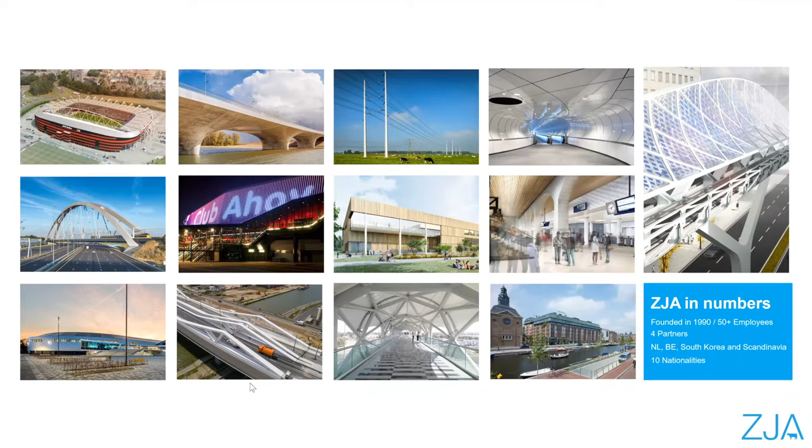For those of you who don't know us, we are ZJA. We are an internationally recognized architectural practice founded in 1990 by Moshe Zwarts and Rein Jansma, located in the city of Amsterdam. As a practice, we operate at the intersection of architecture, design, and technology. Our projects range from large-size, complex infrastructure projects - stations, bridges, theaters, stadiums - mainly active in Netherlands and Belgium, and now also getting into South Korea and Scandinavia.

The office is led by Rein Jansma, Rob Torsing, Randall Top, and Ralph Keft, along with a creative team of international professionals from diverse nationalities. We draw upon state-of-the-art technical expertise thanks to our in-house R&D groups, where we focus on computational design and various methods of introducing structural optimization in the design workflow. We are also now really focusing on the SDGs, the Sustainable Development Goals lined out by the United Nations, to see how our design can be informed by these SDGs. We're also trying a bit in the realm of mixed reality to see how that can influence the design workflow and this virtual environment.

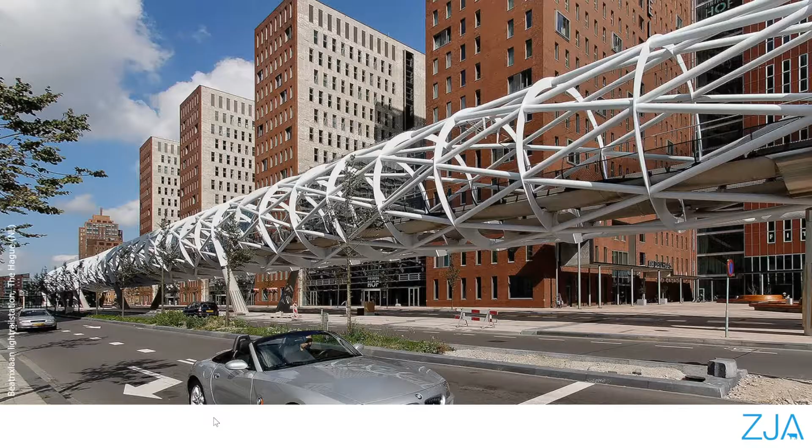We are more than a typical architectural firm. We are not just architects, but we are actually all of these things that you see on your screen. And all these expertises find their ways in our projects via exhaustive research and design. ZJA has been a big advocate of cross-disciplinary collaborations to achieve outstanding levels of innovation.

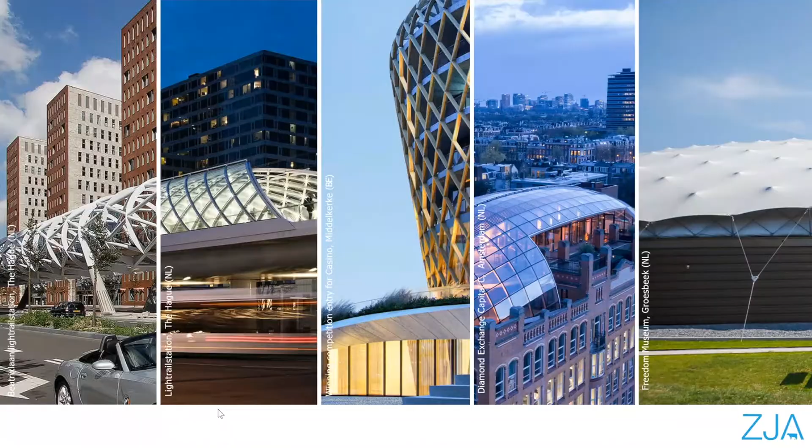We believe in architecture that is technologically advanced, sustainable, and beautiful. These all contribute to the building's character, but in my opinion, it's more than that. Buildings such as the Freedom Museum in Groesbeek that you see on your screen perform in terms of the performative aspect, such as lowering the overall building's energy load while ensuring more environmentally sensitive design.

In the course of time, with many buildings as it goes, there's an increased need for extra surface area, and the museum also wanted to be able to offer a new program that would be more in line with modern requirements. So there had to be a larger building, but one that would fit within the budget.

A solution that met all requirements came in the form of shaded dome technologies. But, what is a shaded dome? Everyone would ask. It originated from the idea of developing climate-controlled indoor sport facilities in hot-dominated physical environments.

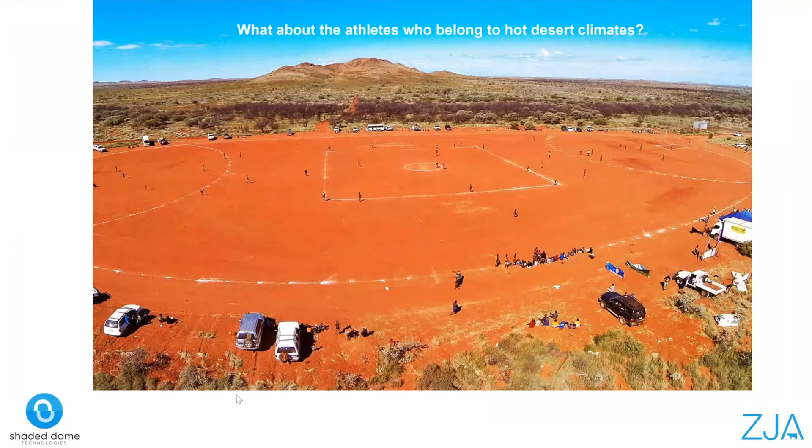The exploration began keeping in mind the FIFA World Cup 2022 in Qatar, which also needed these kind of adaptable indoor training facilities. How could we protect the athletes from the heat? The next question came. The solution to the challenge came in the form of shaded dome.

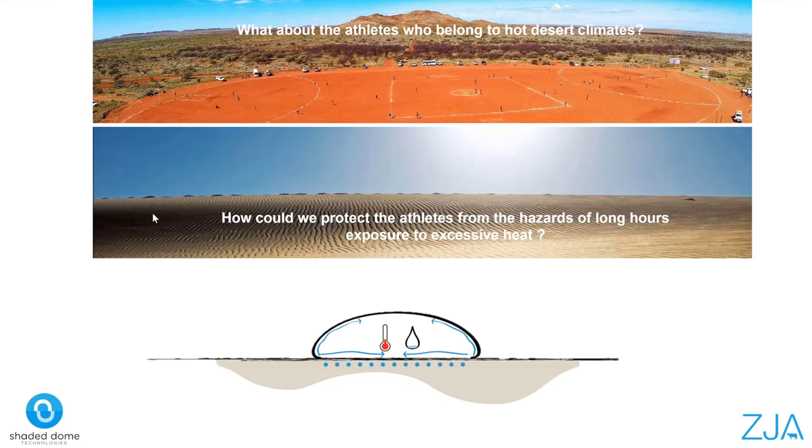It comprises of an air-supported pneumatic structure, which you might have seen in your nearby tennis or football facilities. These inflatable structures offer a perfect solution when it's impossible to perform activities in the open air all year round. Then we introduce a tensile membrane structure, or a tent, on top of it. The combination of the dome and the shade forms a hybrid structure, which we call the shaded dome.

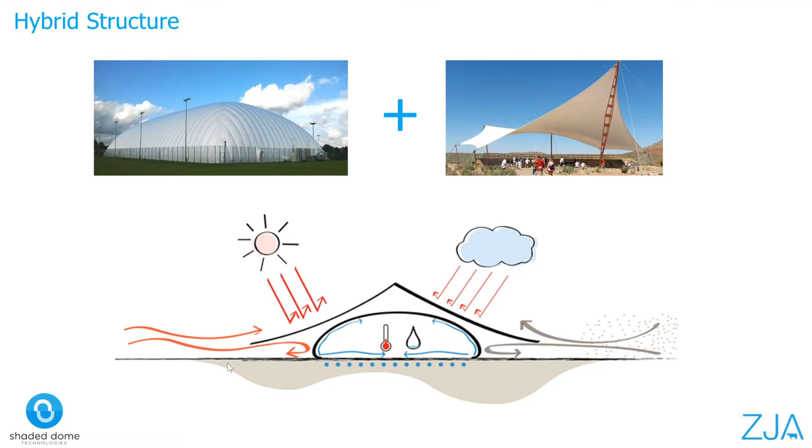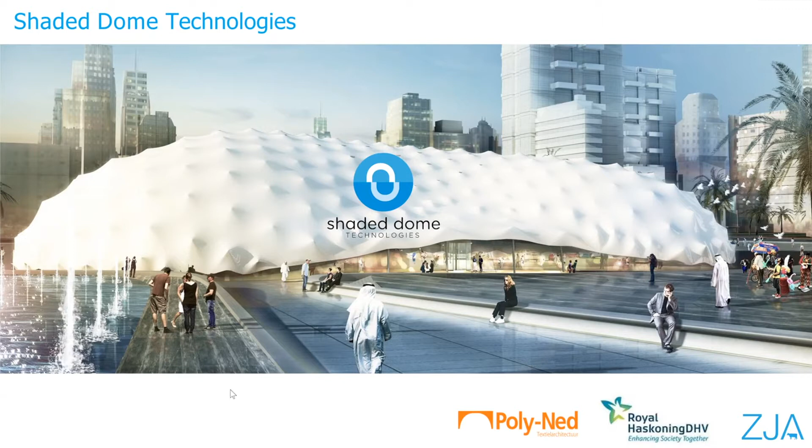3 Dutch companies, ZJA, Royal Haskoning DHV, and Poly-Ned, teamed up and took up the challenge to develop an eco-friendly, semi-permanent and innovative idea. One of the key drivers was being able to quickly assemble and disassemble a shaded dome within a matter of just 2 to 3 weeks.

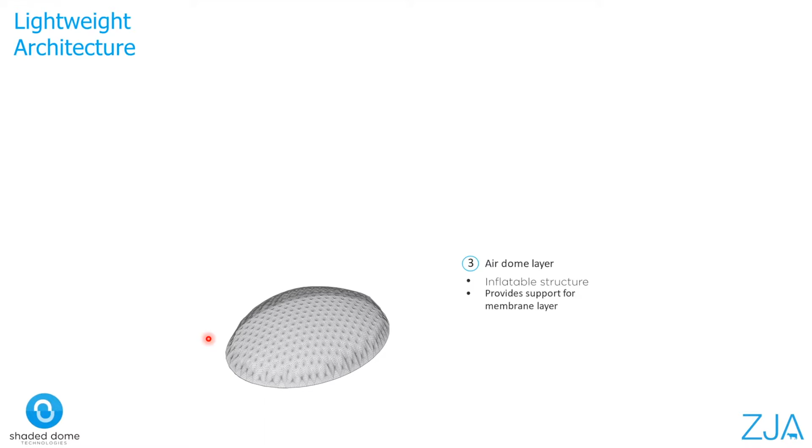Talking about the composition, as I've already mentioned earlier, it comprises of an air-supported dome. This is the core of the shaded dome and operates in principle similar to a generic air dome, allowing air pressure to act as the main load-bearing system.

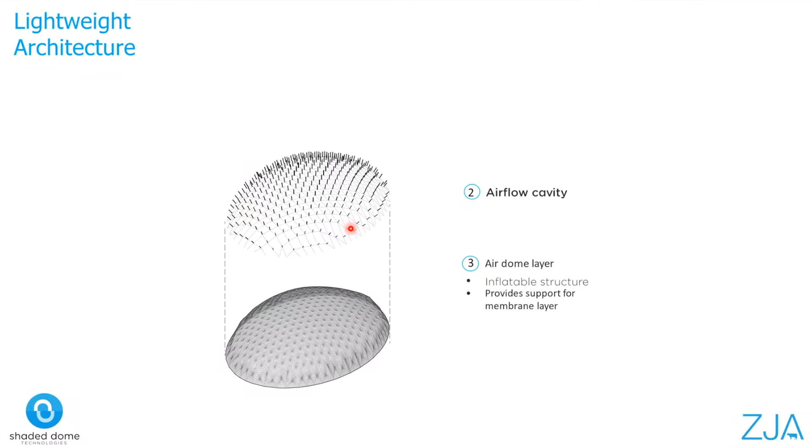The air-supported dome is then covered by a custom-made steel cable network. This cable network dictates the overall shape of the dome and carries the majority of the loads. This is followed by a grid of spacers, or struts, which are these verticals at cable net intersections that form a link between the air dome and the membrane layer, or the shade, on top.

These spacers maintain the cavity spacing and transfer the overpressure from the air dome to the shade, while external loads such as wind forces are transferred in the opposite direction from the shade towards the dome. The shade also, on the other hand, shields the dome from excessive solar radiation, wind, and precipitation loads.

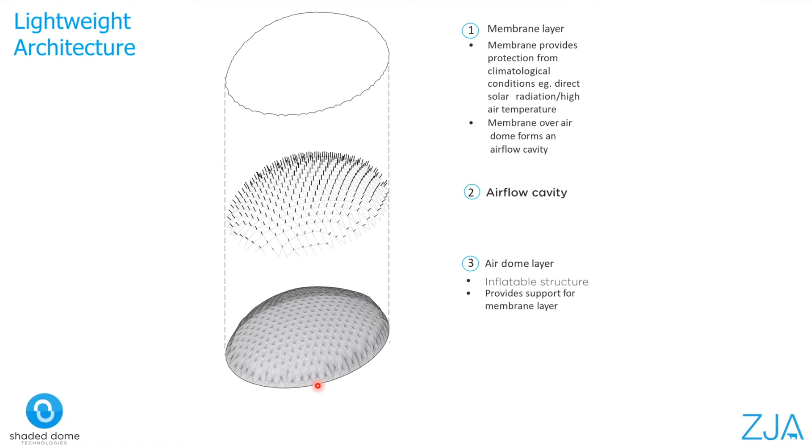Just coming back to some basic fundamental principles. Whenever you talk about a tensile fabric structure, they're generally tensioned, and they achieve their structural stability due to their doubly curved surface or anticlastic shapes.

Here it is no different in the shaded dome. The global convex curvature, which you see, is the result of the overpressure within the air-supported dome, which are represented by these blue pluses, and the force being transferred to the above shade via spacers being represented by these blue arrows on your left-hand side corner.

These patches contribute to the local concave curvature. The combination of a global and a local curvature within the tensile membrane provides stability to the form.

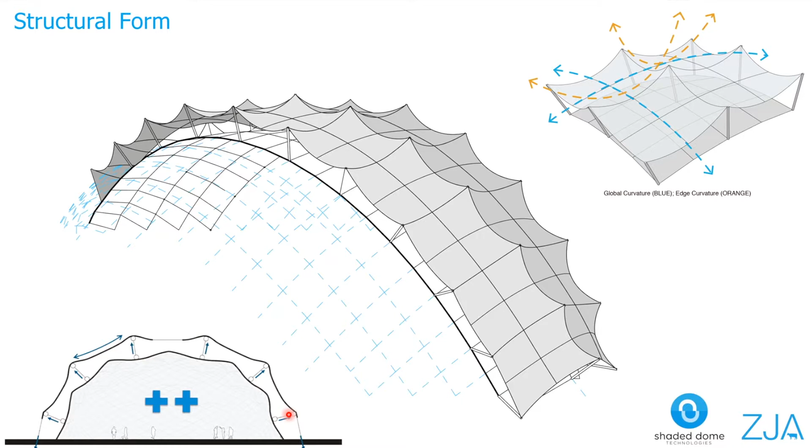At the periphery of the shaded dome, in the two corners you see here, the membrane is fixed to the foundation by either anchors or suspension cables.

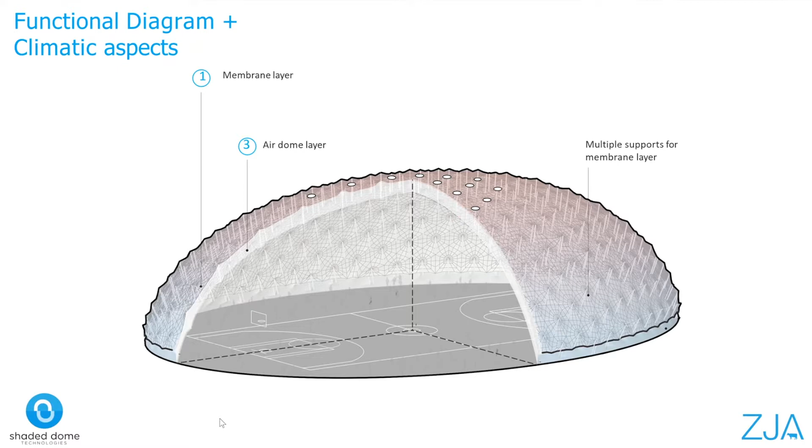Let's talk about the climatic aspect of it. The air cavity between the shade and the dome acts as a buffer zone between the outer climate and the inner microclimate. When direct solar radiation hits the shade, the heat conducts through the membrane and heats up the air within the cavity. As a result, the warm air rises to the top of the cavity, where we have openings present, releasing the warm air out.

Due to the chimney effect, the cooler air is automatically drawn into the cavity from the ground level, thus creating this continuous flow within the cavity.

This principle has been validated using both computational fluid dynamics simulations and physical prototyping. It has been observed that this can bring down the temperature inside the dome by 5 to 10 degrees, which is very useful for warm weather climates, but could also be useful in cold weather climates.

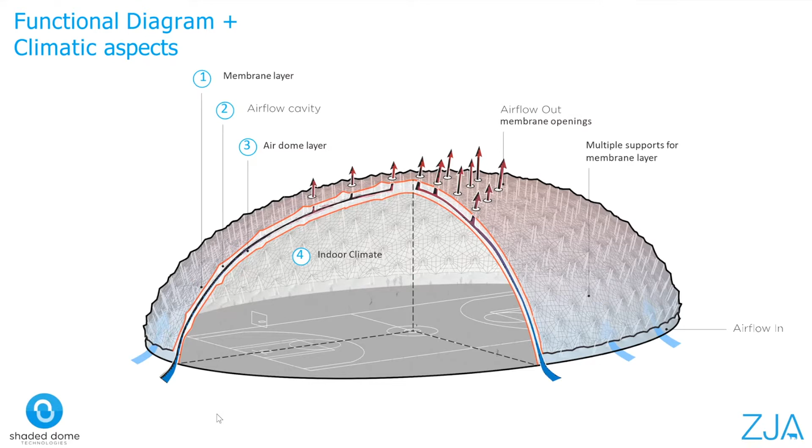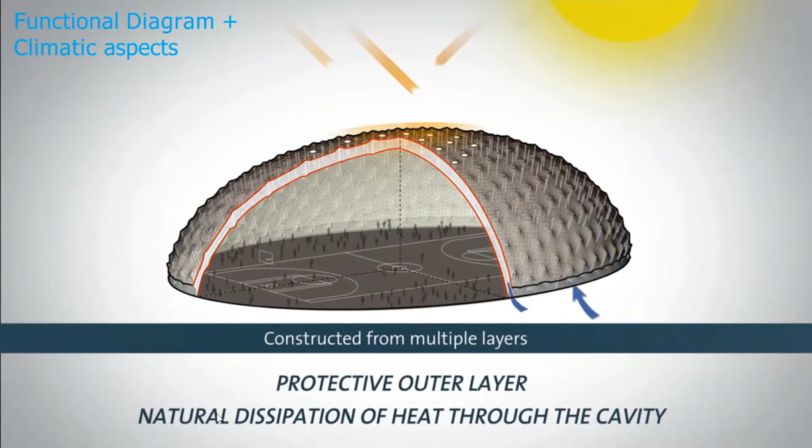Although air supported structures and tensile membrane structures are quite common, the combination into a hybrid structure like the shaded dome is quite unique and novel, and therefore the design has been granted a European patent. It is something we are really proud of.

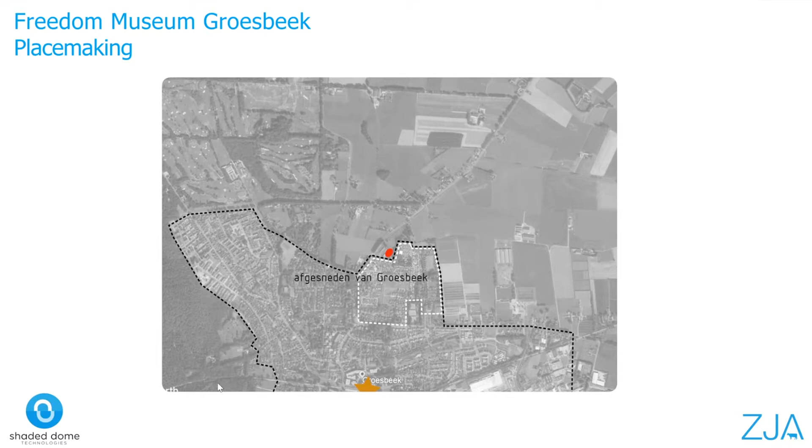Now that everyone is aware of the shaded dome concept and how it operates, let's talk about the Freedom Museum. It is located on the edge of the village Groesbeek, as you see here.

The old existing museum building was very inward looking and did not do justice to the location and the beautiful views around. One of the most important starting points for us was to adapt the museum to the landscape. This theme is reflected in our design in various ways, and you will see it coming back as we move along in today's talk.

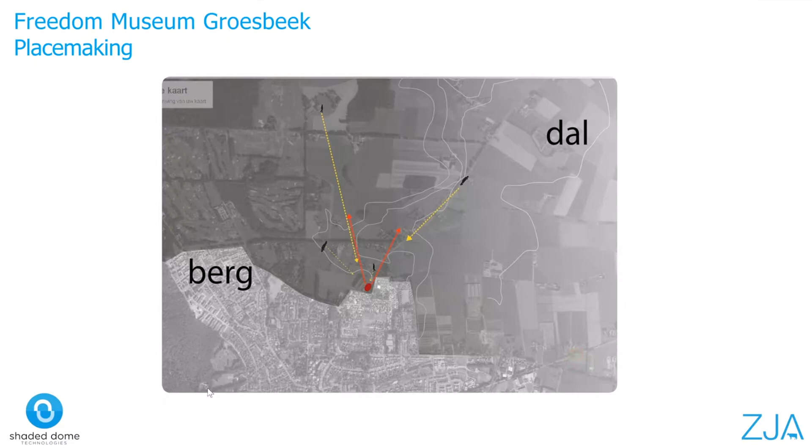The idea was to reinforce the existing slope and create a visual relationship with the valley, thus connecting the museum with its immediate surroundings. Here, the shape of the landscape was determined by the shape of the new building and the functions which it holds around.

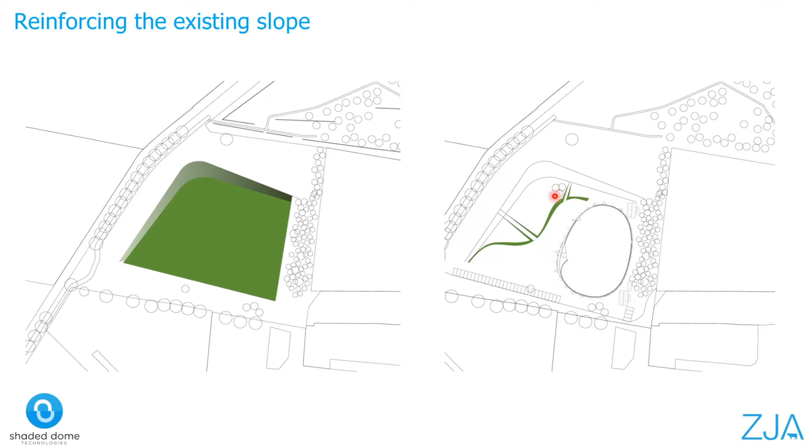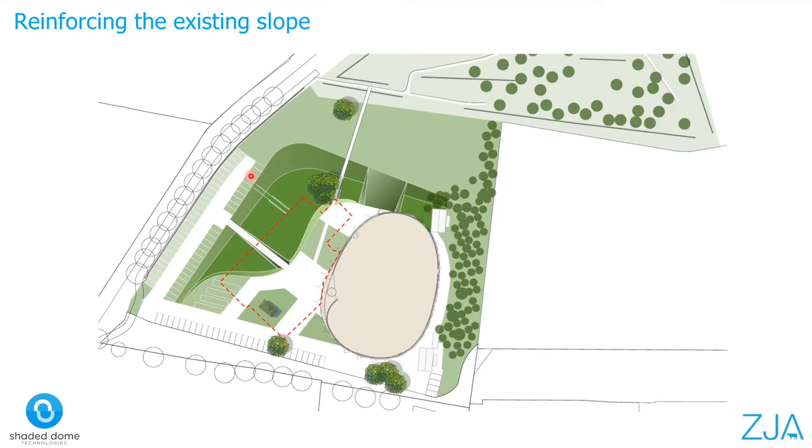The museum is aligned towards the landscape, marking a clear entrance for visitors and framing the view over the valley. The dome is also tilted so that it opens towards the front court, and hence the plinth is created, which acts as the front facade of the building.

The museum stands out for its iconic appearance within the green and flowing landscape design.

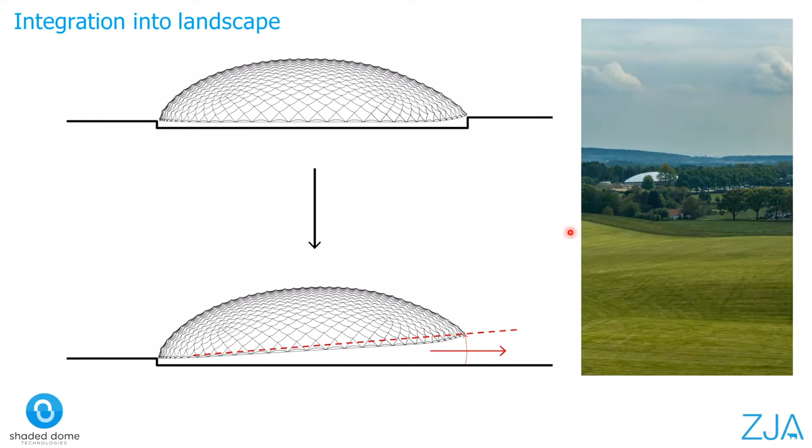The building is approximately 64 meters in length and 46 meters in width, and at its highest point reaches approximately 12 meters. The building operates at two different levels, one being the main ground floor level and the other being the basement level.

Let's give you a short tour around the museum. As you visit the museum, you encounter the main entrance.

Here you see the plinth peels and bends inwards, creating a niche where the front entry door is allocated. This inviting gesture immediately informs the visitor of the right orientation to enter the building.

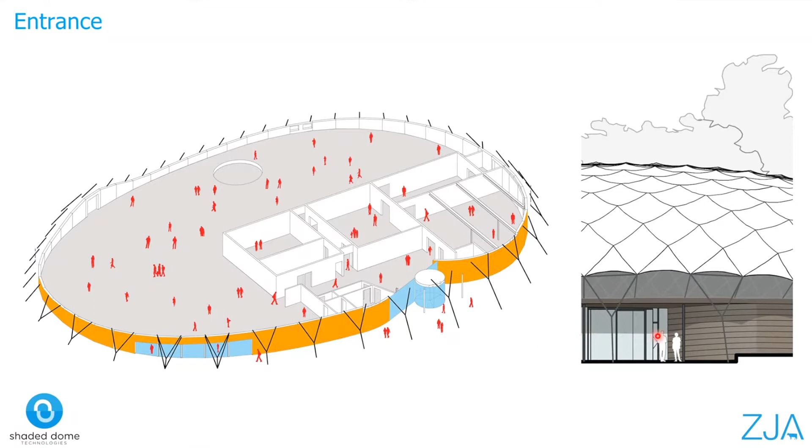A simple bronze colored seamed aluminium, or kalzip as you call it, was chosen for the cladding of the plinth. The horizontal lines of the cladding also accentuate the sense of movement and dynamism.

Once inside, the visitor walks into the front desk where they are welcomed, and the height and spaciousness of the interior space is quite noticeable as you enter.

Due to the large free space that the dome offers, it provides many possibilities for organizing exhibitions, as there are no restrictive constructive elements like columns that you might find in any other traditional building.

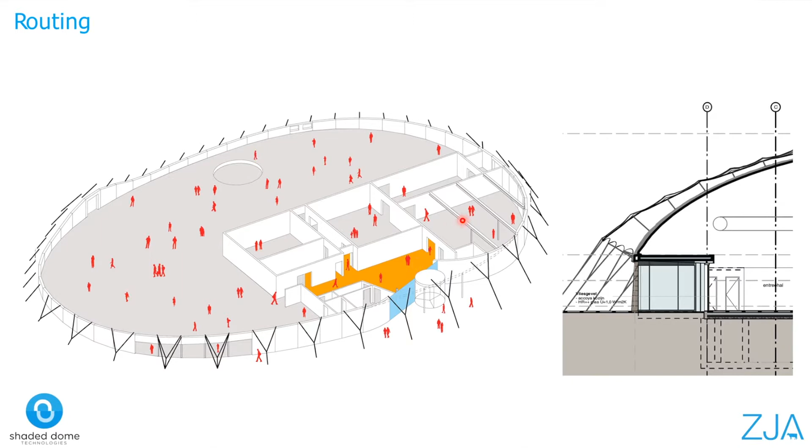After leaving the coat in the cloak room, you can choose to visit the temporary exhibition or the permanent exhibition in front of you. Let's begin with the temporary exhibition first.

One of the challenges for us was to keep the exhibited pieces in top condition. These pieces are quite old and fragile in nature, so it was very important that the indoor climate could be managed properly and controlled.

Thanks to various methods or measures such as extra insulation of the roof and the box-in-box solution, we were able to achieve the desired level of indoor climate control in terms of temperature and relative humidity.

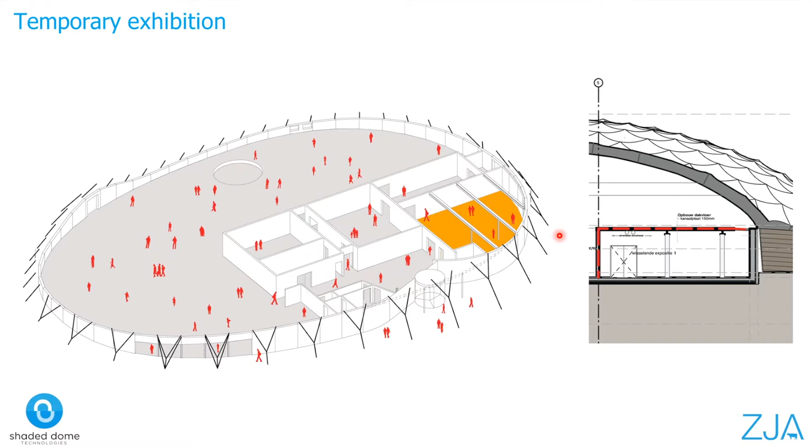From here, the visitor enters the permanent space through a wide corridor in the middle of the dome. The dome from within is completely black. It was a deliberate choice to accentuate the focus of visitors to the exhibits. The exhibition space is around 1300 square meters and has an indoor climate in accordance with ASHRAE Class A specifications.

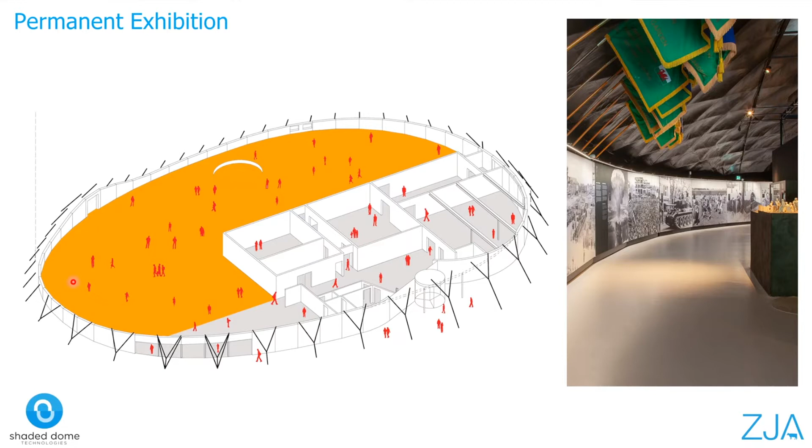The visitors can then move towards the museum cafe. This space has a very different atmosphere and has a more indoor-outdoor feel to it. Here the visitors can disconnect from the exhibition for a while, enjoying a nice cup of coffee, and can enjoy the view of the valley from which the Allied divisions once left for Germany.

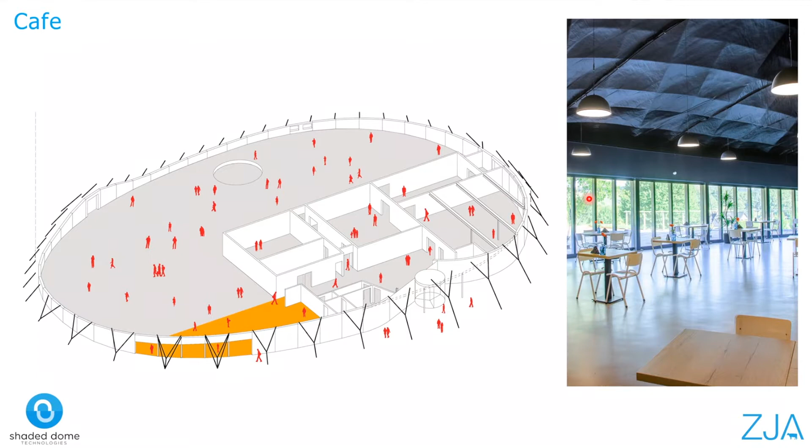Apart from these exhibition spaces, toilets, and shops, the basement accommodates many of the museum's supporting functions like meeting rooms and working spaces. The museum is also connected to the existing depot below the demolished museum by means of an underground corridor, so that all supporting spaces remain interconnected. It's also a way of bringing how you can connect the new with the old so that there still remains a connection between them.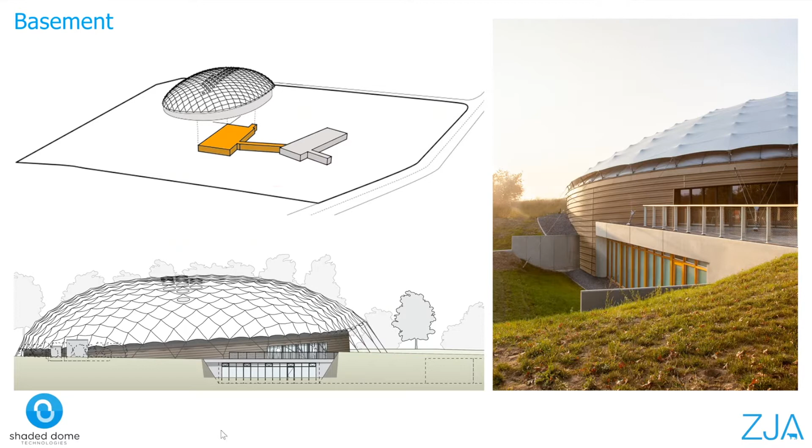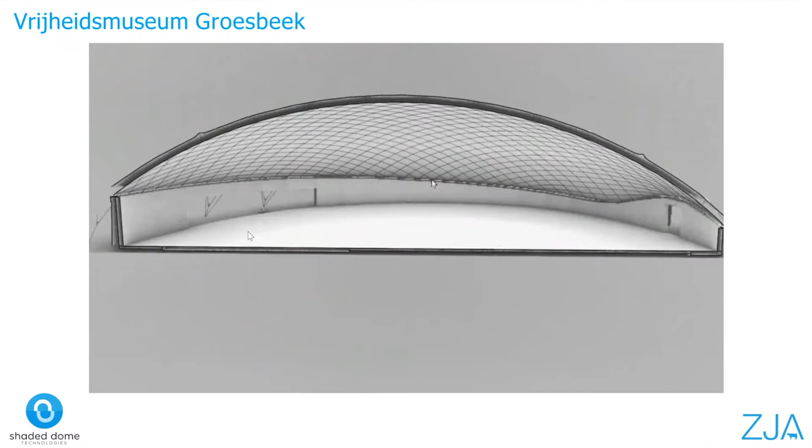Just to give you an overview of the internal spaces within the Shaded Dome, you can see the box-in-the-box concept and this immense volume it encloses. It's an incredible space to be in, and I would really advise, if you have time after corona, please visit this museum and experience it. It's a very special building.

Which province is it located in? In Groesbeek, it's in Gelderland. Okay, Gelderland, yeah. It's not that close, but okay, you have to make a plan.

And of course, for constructing such an unconventional building, you need the right set of tools for the job. We at ZJA worked out the geometric principles for the Shaded Dome and created the computational design tools that make it relatively easy for us to take the first steps towards architectural design. It allows us architects to pull or push the geometry, but it's also a bit more than that—it's also an informed decision. In order to assess the most aesthetically acceptable and tentatively stabilized form, the design requirements are the main input for the parametric model.

Therefore we use several generative and computational algorithms, such as positioning the entrances, optimizing the size of the fabric patches which form the shade and the dome, producing the cable net, and using relaxation and inflation simulations to get the right form. Hence we do have a shaded dome generated in a virtual world, but it's still very much disconnected from what happens in reality. So this is the first step—we have the shaded dome in the virtual realm.

Next step: the parametric model we generated does not provide constructive information yet. Its primary function was to determine a rationalized shape and geometry. This geometry is later explored and validated by our engineering partners Royal Haskoning DHV in terms of structural engineering and building physics, using finite element method analysis and CFD simulations to validate. We did our own CFD simulations in-house beforehand just to see where we stand, giving us insight into how it affects the building geometry, but the final validation was done by the engineering partners.

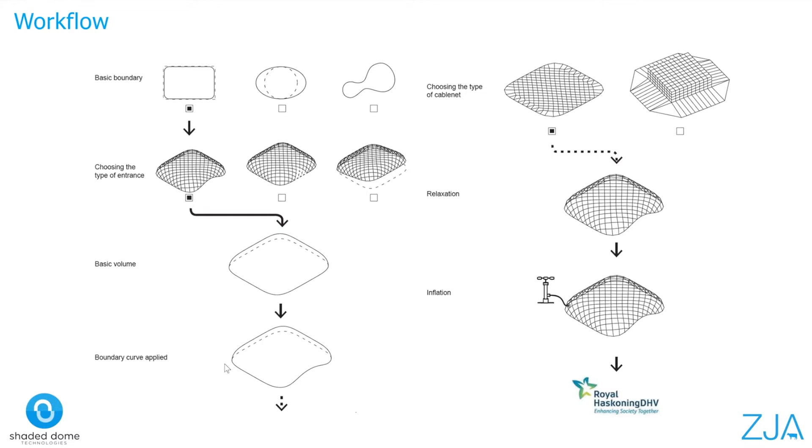After this verification, the latest adjustments were introduced to our parametric model. Our algorithm then generates relevant files for the components—the dome, the cable net, the struts in between, and finally the shade and suspension cables—which are necessary for manufacturing and assembly of the building.

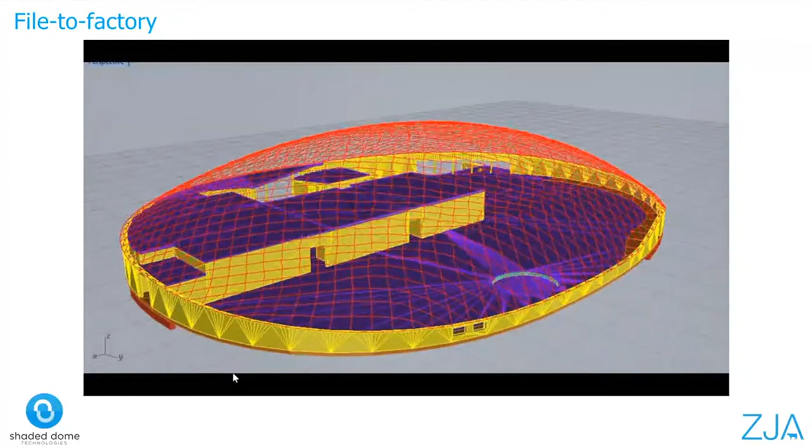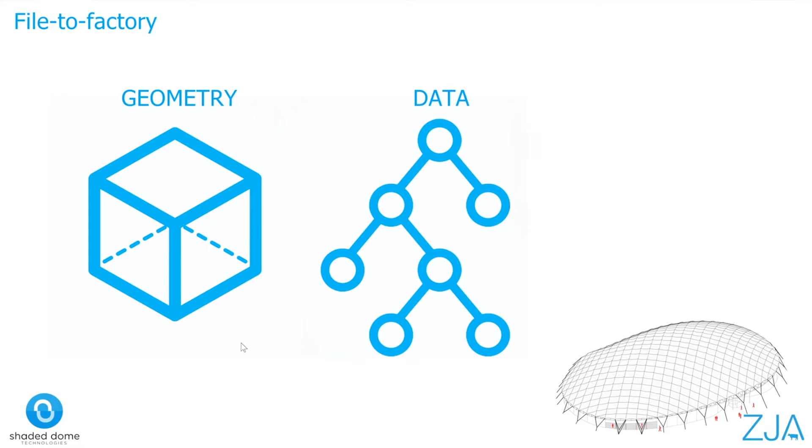In our construction process, we actually skipped the step where, generally speaking, a fabricator is assigned to create his own set of working drawings, which contributes to extra time, money, redundancy, and inefficiency. Trying to manage the stream of data trees in the form of points, lines, and meshes was a challenge in itself. I'd like to give a shout out to my colleagues at ZJA, Jack Bucker and Ralph Kluth—they played a key role in this regard, bringing order to this complex tree of geometry.

What we managed to achieve here is a paradigm shift in itself when it comes to design and production workflow. Different parties involved shared their insights with other partners. For instance, Polynet had to share their knowledge about the nuances of fabric material properties with us. Otherwise, we would not have been able to make such an informed and working simulation.

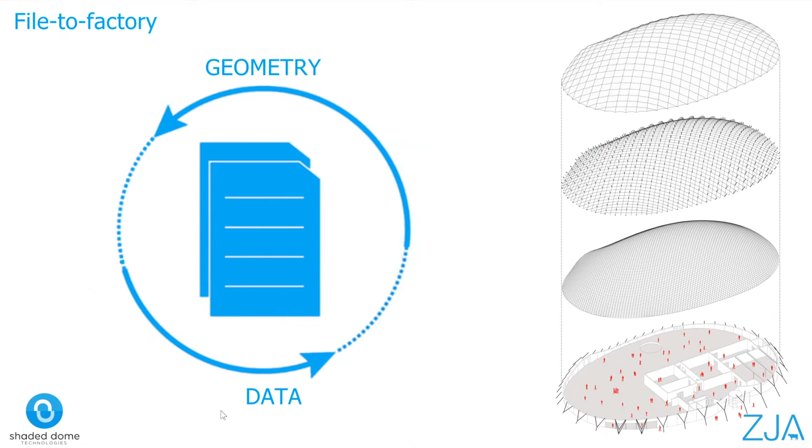So once we are happy with the design, the next step is the production. Let's follow the same sequence which we already discussed for the shaded dome. First comes the dome.

It is made up of 3 layers: an interior fabric layer, followed by an insulation layer with an R value of 1.6, and finally the exterior fabric. The strategy was to make as many straight strips as possible and few wedges to create the necessary curvature. The sizes of the strips were determined by the rolls of fabric available at the production facility of Polynet. We tried to optimize the shape to avoid doubly curved occurrences and approximate the 3D model as closely as possible.

In this entire process, it was important to be very accurate, consistent, and take tolerances into account.

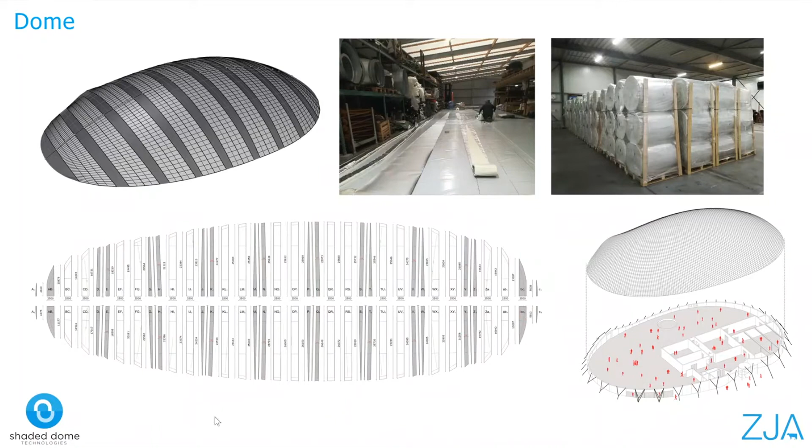Next comes the cable net. It provides stability to the construction and is anchored to the peripheral concrete walls using brackets. Each cable we generated needed a number and a list of lengths to mark where it intersects another cable. It's a very complex process, and you can get a bit intimidated by the numbers it generates, but using this parametric tool made it really easy to control and get a grip over the entire process.

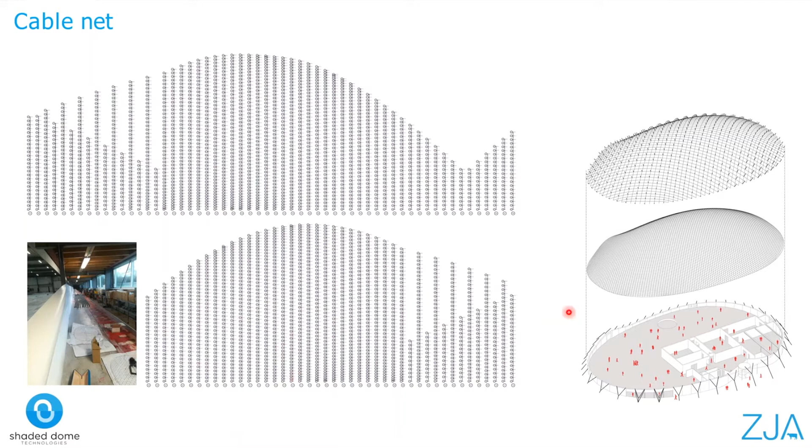Next comes the struts, or spacers, that form the link between the dome and the shade above. The shade consists of steel cables running along the edge, as you can see here. At the edge, the shade is further tensioned by anchoring it to the ground using suspension cables. The shade is also connected to the wall via a bracket.

This bracket detail is in the middle of your screen. It holds the cable, which you see here, with these shackles, and the struts with a hinge connection that is further bolted to the concrete wall.

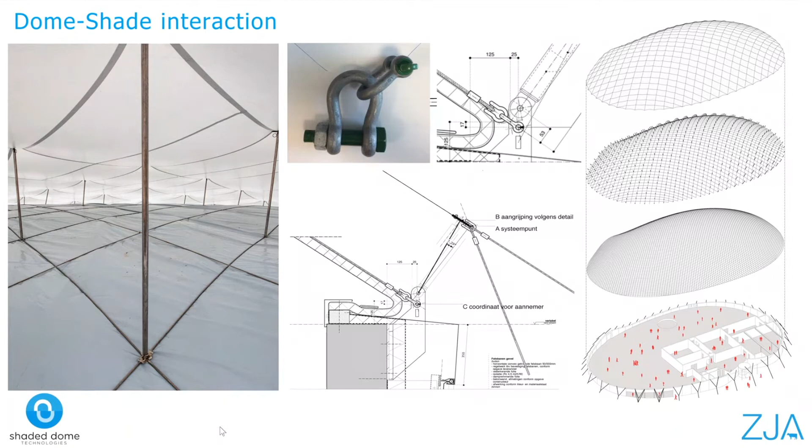For the shade, we had to cut around 438 patches and weld them together with an overlap of 40 millimeters. Each of these patches had to be labeled in order to know which adjacent patch connects to which. This also provides a sense of organization to the entire scheme.

Orientation of the patches on the roll was equally important, due to the warp and weft factors which influence flexibility within the fabric material. For our audience who doesn't know what warp or weft are, they are the basic components used in weaving to turn a thread or yarn into fabric. The forces on each patch actually run in both directions, but they are not perfectly orthogonal. So we had to rotate each and every patch until the deviation in both directions was the same.

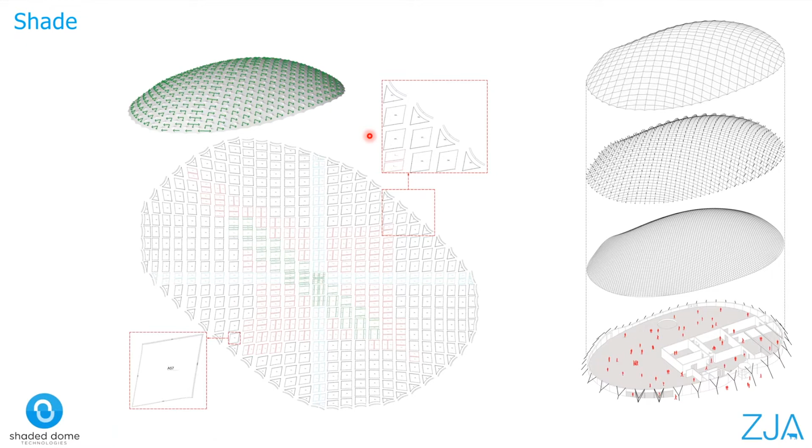As per the shaded dome concept, heat within the cavity space between the shade and the dome flows towards multiple openings in the top, in order to accentuate the ventilation. Some patches within the shade were introduced with perforations. This amount is determined by a formula - the bigger the dome, the more ventilation patches you need. Here you can see the opaque fabric and the gauze fabric welded together.

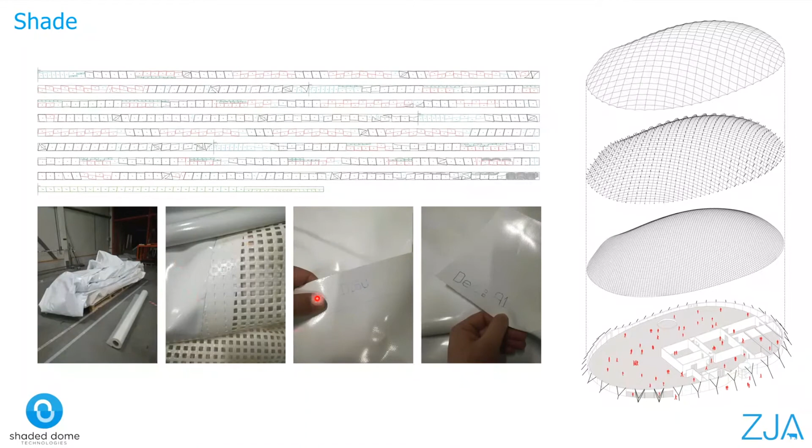I think in this image you can quite clearly see, on top of the shade, the openings where you have this combination of gauze fabric and opaque fabric coming together.

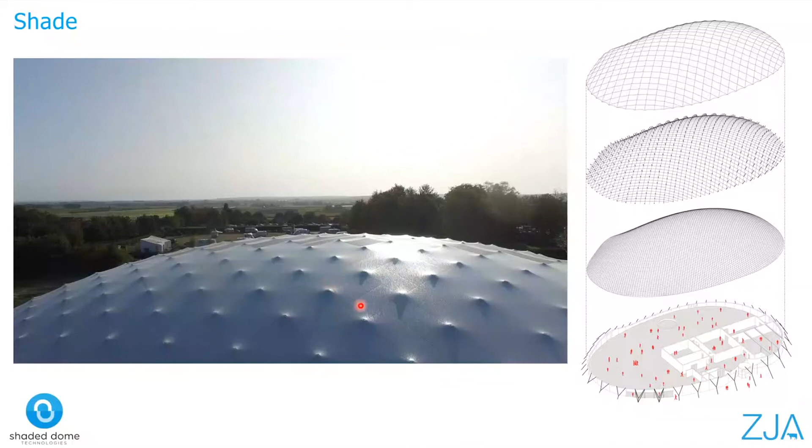It is also a very important step that, in a building - or in this case the dome - the rainwater runs along the seams from top, from the upper fabric parts to the lower parts. It sounds quite logical and simple, but it's quite a puzzle in itself, especially when you are making each and every patch individually. So to get the right order is quite a complex task. Here our computational script helped us in giving this the right order.

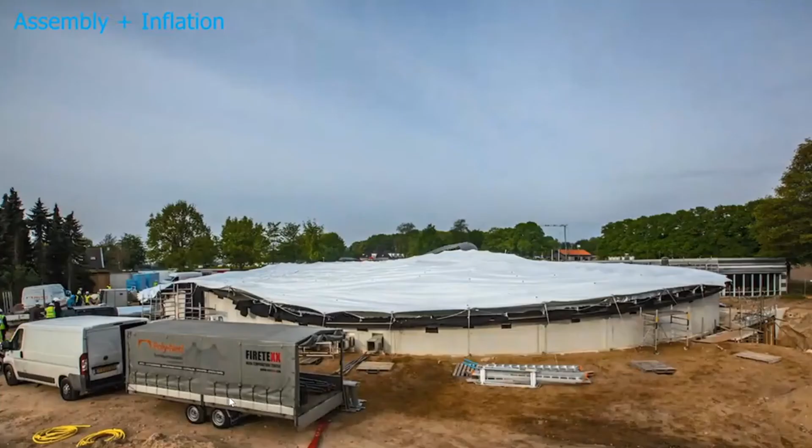Once all the components of the dome have been calculated and produced, it is only a matter of assembling and inflating it on the building site. It took us less than 3 weeks between the moment the parts were delivered to the building site and the moment the construction was actually ready for use.

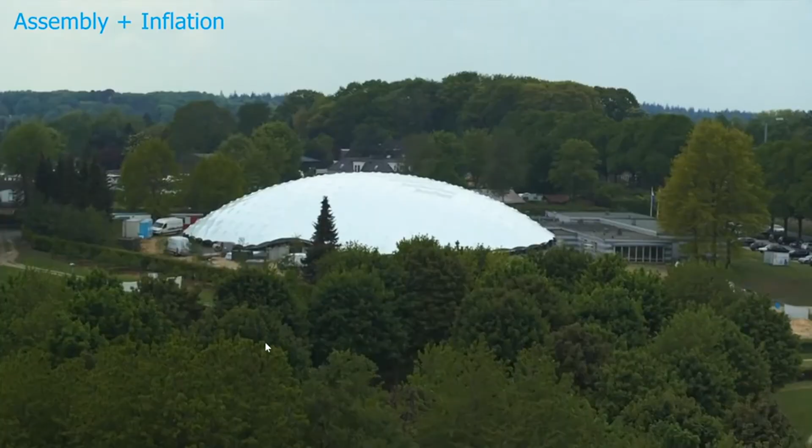Yeah, it's a nice drone shot. And this view, for example, you will never experience today. It's a special view between the shade and the dome. I think only in this video can you see that.

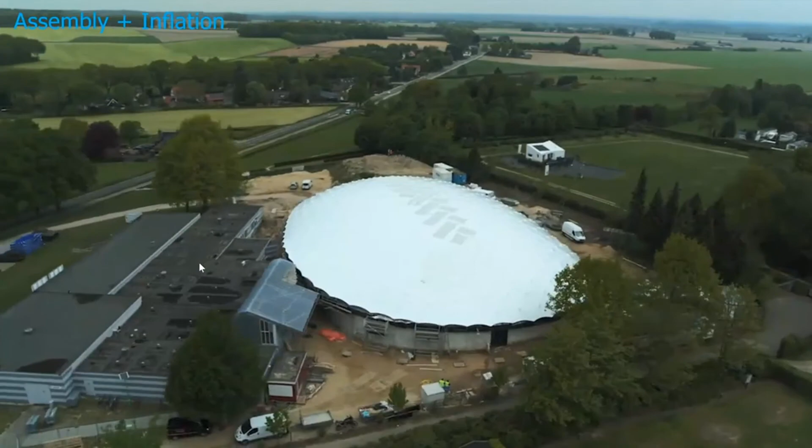It was a really special project for us. Everything we had drawn was actually built as it is, without compromises. It was a completely different workflow for us than we are used to. So this has provided us also with a lot of new insights in terms of how you play with a fabric, for instance, and how you play with inflation and how you play with inflatable structures.

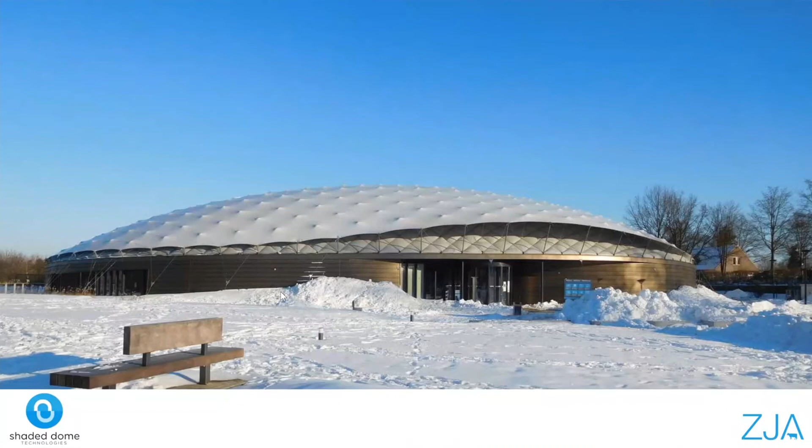Roof of the Freedom Museum stood firmly against the heavy snowfall loads, which also took place in the month of February this year, which you all probably are aware of. It also validates the most critical design aspect of the shaded dome, which is to maintain equilibrium between the forces in the dome and the shade. And I think it did quite well in that regard.

The partners in this project have managed to achieve good results thanks to the intensive exchange of knowledge and collaboration. For us, we had to share our know-how in terms of geometry with different partners and vice versa. Though it may sound really logical, it is not so obvious in our day-to-day construction practice to share knowledge without hesitation with any other next party. But by doing that, you are also able to push the boundaries in a better way, and you can achieve magnificent results eventually.

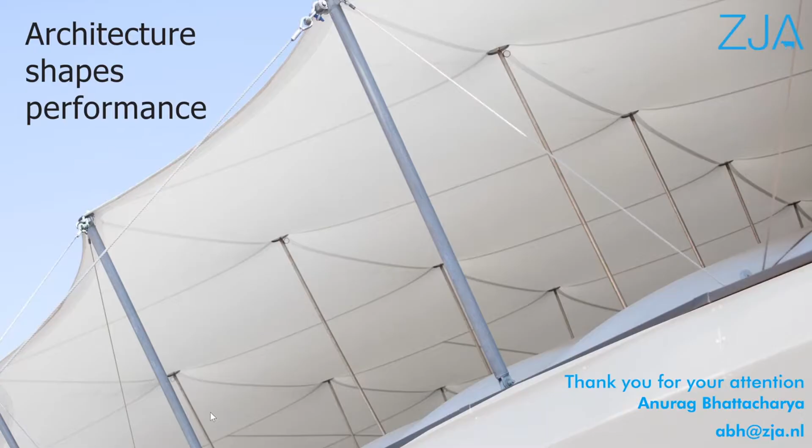By this, I hope you all enjoyed and took something away from this presentation. It's a very complex process. I tried to boil it down a bit. I hope you take something away from it, and I would like to really say thanks for taking time out. And yeah, I'm now open for any questions if you have.

Thanks a lot, Anurag, for the interesting presentation about the shaded dome. Thank you. It's really nice to see this whole project coming together from this parametric model where all these detailed requirements are in, even the allocation of all the patches in order to have the rain dripping off in the correct way. What I was curious about, this is actually a multi-company project.

Yeah. How did that start? Because I can imagine it can be experienced as a really scary thing to share your knowledge with other companies. So how did that kick off?

I think it is indeed an incredible process. Every company is different and they have their own interests and shares. But in this project, they decided to come together and join hands for the betterment of developing a technology which didn't exist. So that's why there's like a boundary - you have to break through those boundaries to achieve these kind of outcomes. Otherwise, you can't get a patent for something like this.